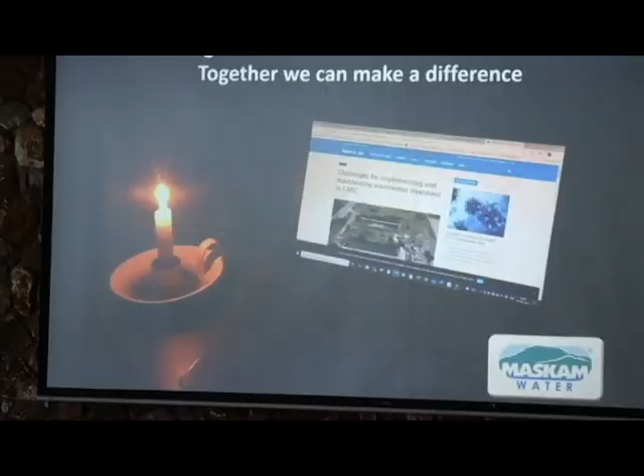Let's look at where we can make real big impacts: wastewater. Things have changed quite a bit compared to 5 or 10 years back. In general, if you have a high density commercial area and you need to start treating wastewater and use it, how many people think it's possible to do that in a high density city environment?

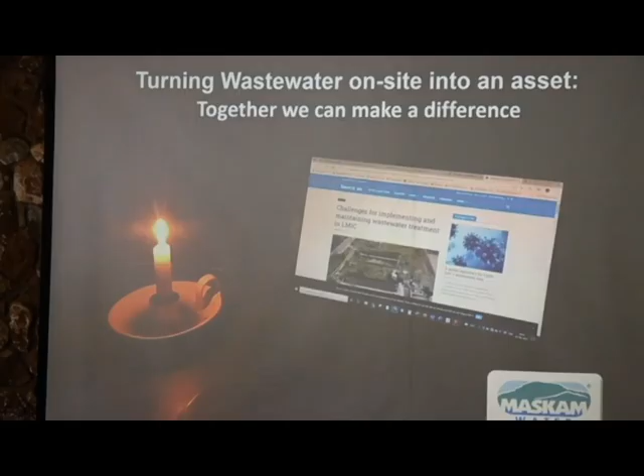That's only 4 people in the entire room. Well, okay, you're one of the 4, Laura. Let me show you something.

First, let's look at our water cycle. We have our catchment area, which normally ends up in a dam somewhere. We abstract from that dam, put it through a filtration system, use it, discharge it through an overloaded municipal wastewater treatment works, and pollute our water course.

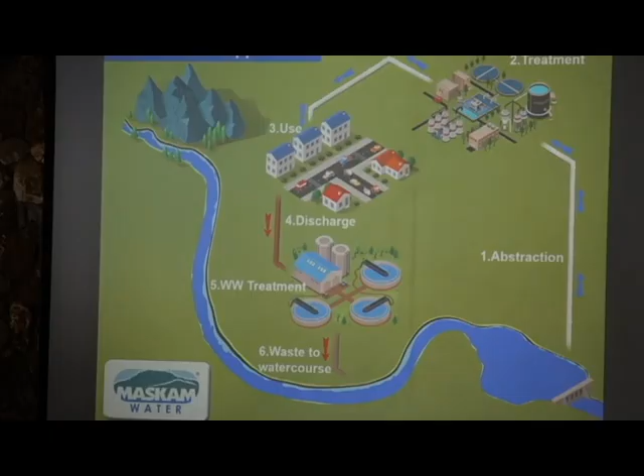This is very important. Remember what I said earlier, when you flush it, it's gone, it's out of sight, it's not your problem? Look what's happening here - it's coming back to be your problem because you're feeding it into a water course that feeds your drinking water. I do apologize for the sensitive ears, but you're literally pouring into your own drinking water. When you discharge your wastewater to a non-functional or overloaded municipal wastewater treatment work, you're pouring into your own drinking water.

There's no nice way to say it. Now, but in my town it's different, because in my town this wastewater system discharges below the dam wall. Oh, beautiful, you just feed it to your neighbor. Come on, where's Ubuntu here? That's what we end up doing.

At the previous meeting, I asked everybody by a show of hands who believes eating healthy is good, and just about everybody put up their hands. Then I asked who likes some nice grapes every now and again, and everybody put up their hands again. I said, now you think if you flush a problem in Gauteng, it's going to go down the Vaal River and it's not your problem? Guess what? Your grapes come from Upington.

The farmers in Upington have a problem with E. coli in their water in the river, because that river is coming from Gauteng. So you export your sewage problem to Upington and you import it back in the form of grapes. That's how the water cycle works, whether we like it or not.

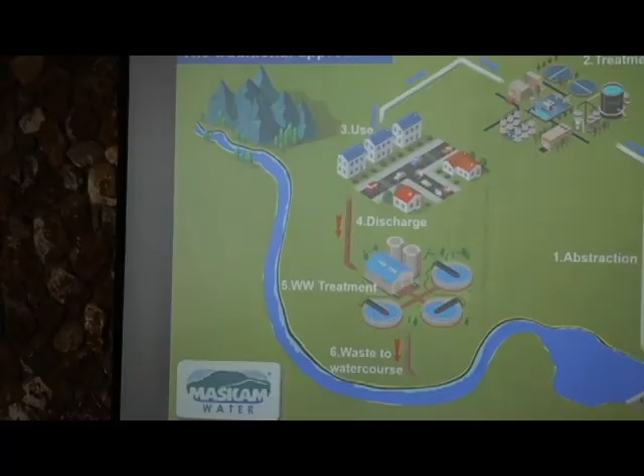But there's another little problem here - the carbon footprint. Not many people think that water has a carbon footprint. It's a natural thing, how can that have a carbon footprint? Would you agree?

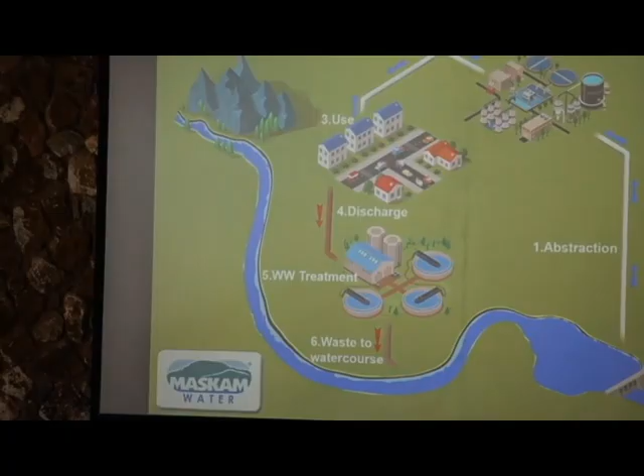Well, the problem is, if you're in Pretoria and you get water from the Vaal Dam, what's the figure? About 60% of Pretoria's water is coming from the Vaal, I think. If you look there, that's 124 kilometers line of sight, so you're looking at about 150 to 200 kilometers of pipeline needed to pump that water. But your problem is, from here to there is a 300-meter rise. You need 30 bars of pressure to lift the water to Joburg before you can flow it down to Pretoria.

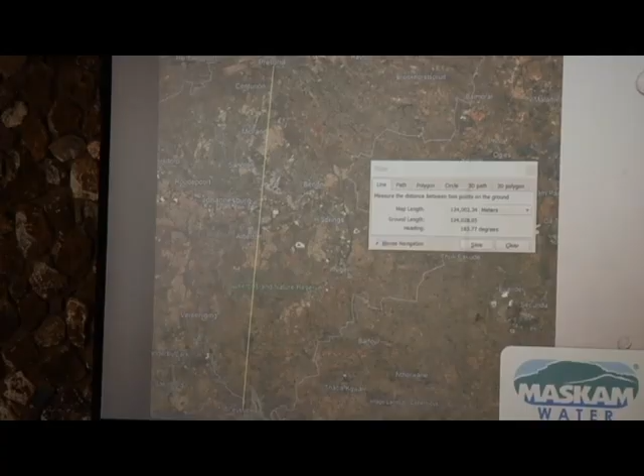30 bars of pressure - to give you an idea, your irrigation system at home runs on 3 bars, your average geyser runs at 4 bars. We're talking 30 bars here to lift that water to Joburg before you can get it to Pretoria. What is your carbon footprint on that pipeline? What is your carbon footprint on those pumps? What's your carbon footprint on the electricity that you use for that? Now we're not even talking purification and all the other stuff that goes with it. So your cost and your carbon footprint become huge in cases like this.

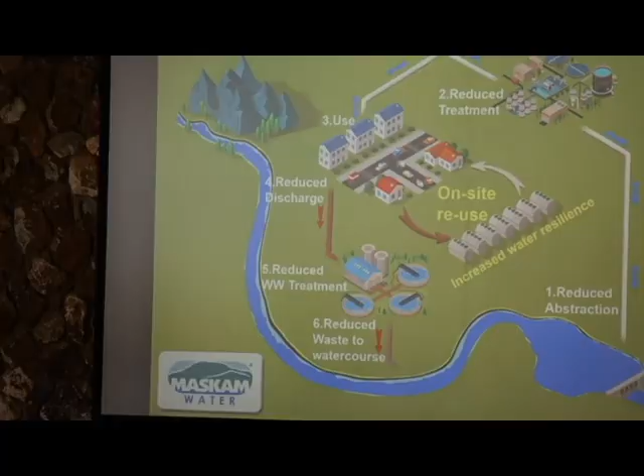So what we now do is start thinking a little differently. When we do on-site reuse, whatever wastewater we have, we treat on-site and take it back. We now start talking about increased water resilience. Every time you flush a toilet and treat it, you have water to flush the toilet again, no matter whether the municipal water is on or off.

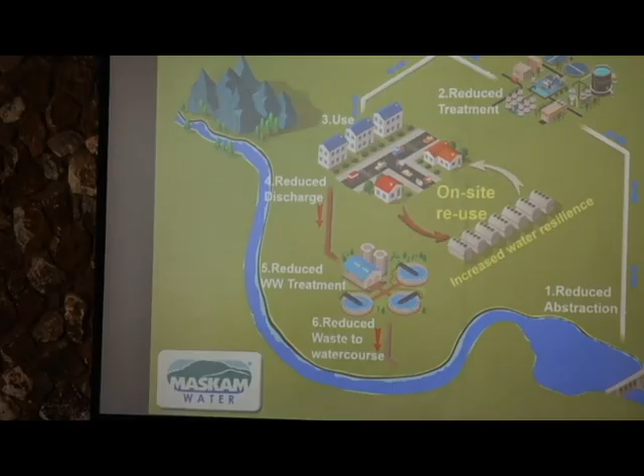So we're also talking continuation of operation, because people can stay on site and at least use the ablutions. Yes, you may have to buy water from your local grocery store for making coffee, but at least you have water for ablutions that you don't have to truck in. The minute you do this, you reduce your abstraction from your water course.

You reduce the pressure on your treatment system. You reduce your discharge, you have fewer overflowing sewer manholes, and you reduce the volume into Olifantsfontein wastewater treatment works. So you get a better quality effluent feeding the Hennops, which eventually feeds Harties again. So you improve your total water cycle.

You score big money here. Coming back, I don't have the figures right now for City of Tshwane, but for City of Joburg, commercial again, we're talking 98 Rand a kiloliter to get water from there. For commercial reuse here, you can do it for as little as 8 Rand. A saving of 90 Rand, that's a saving of close to 90%. Which other investment will give you a saving of 90%?

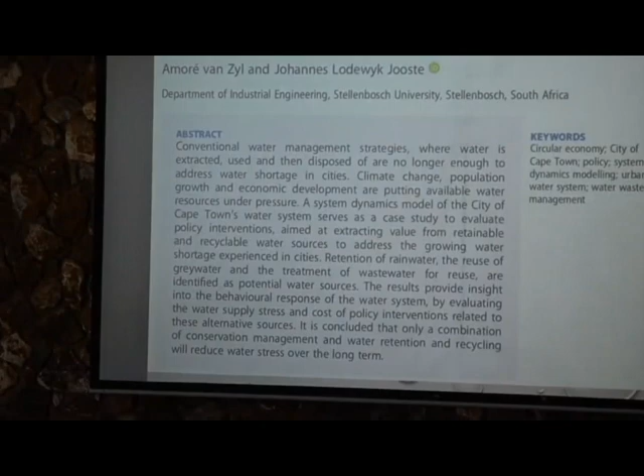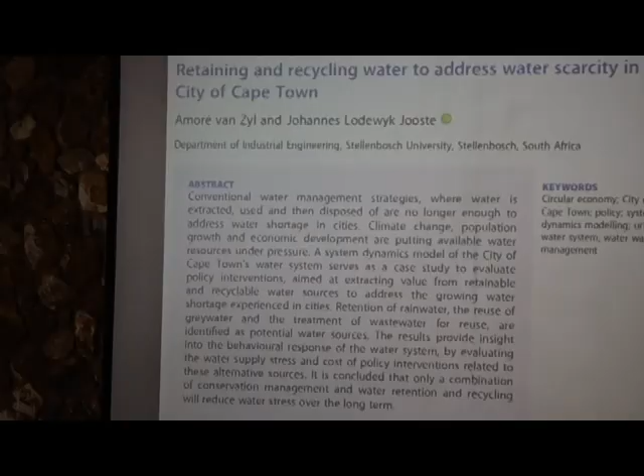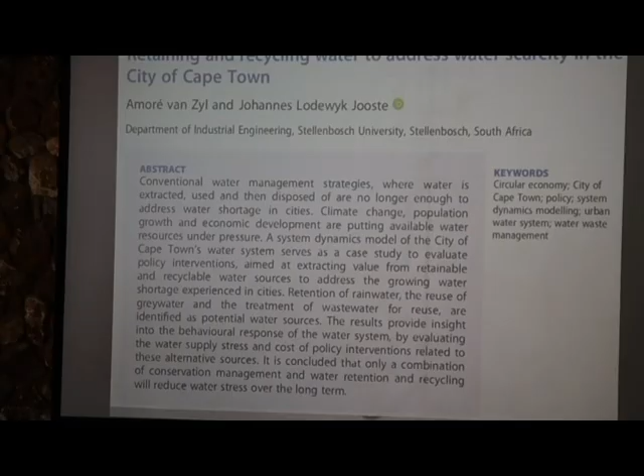In 2020, the University of Stellenbosch, and I'm not going to try to give you all the details, but in 2020 the University of Stellenbosch said: retaining and recycling water to address water scarcity in the city of Cape Town. They looked at all possible water sources taking Cape Town into the future. They excluded desalination because of the cost. And there's this whole document, if anybody wants it we can email it to you, talking about the benefits and how you can move forward, and how recycling will save the day and become a water source for the future for Cape Town.

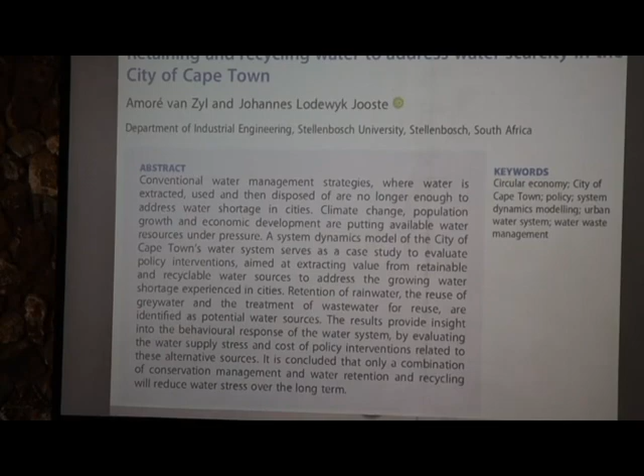Exactly the same thing applies here. I'm going to show you one technology. There's not enough time to go through different technologies. Yes, it is our technology. I'm a little bit biased here, okay?

The fusion system, which is an underground installed wastewater treatment plant, will recycle your water on site for you. It comes standard with a panel that has an early warning system, so if anything goes wrong with this system, it will immediately warn you before you have a pollution problem. And these early warning systems, I think, are critical, because something can go wrong, it's man-made, but you need to know when things go wrong.

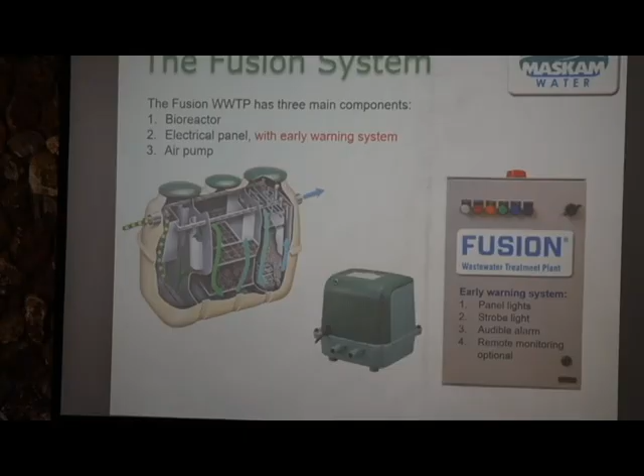So before you look at the price, because that's what most people do, before you look at the price, look at what you get for the price. Because I've seen that so often, people buying cheap and then having to remove it again later.

I'm not going to spend time on the technical side of it. Just keep in mind, without disinfection, there are at least 6 steps of treatment that need to happen to get to the water quality that by law you need to get to if you want to use or discharge this water. But at the same time, again, for pollution, otherwise you end up paying again with your drinking water.

Case studies. Where do you think is the highest risk installation you can have, in terms of if your system fails, you will have big problems? Where do you think is the highest risk installation?

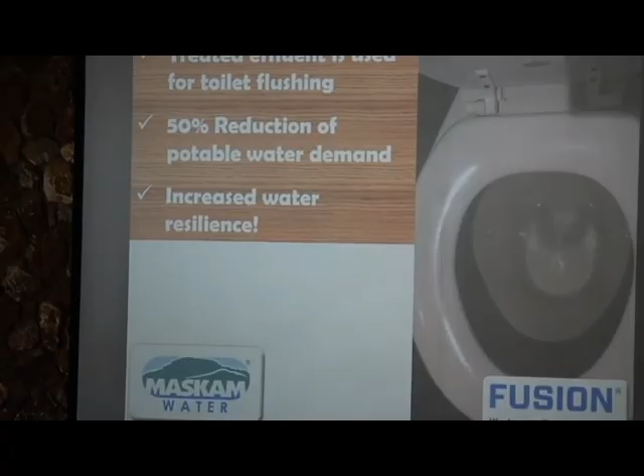The user experience, Nora, good or bad? Very good. This is what we're getting out of the system. And we've cut the water demand by 50%. Remember I said for domestic toilet flush it's about 30%. Here we're talking about a commercial building where toilet flush can be up to 90%. In this case it's 50% because they have showers and stuff as well. So you've just cut your water bill by half, but you also have water resilience, you always have toilet flush water.

For 6 years going now, I think the case study speaks for itself. You can do it in the city, you can make a positive difference. And that's why today's theme is talking solutions, because we hear so much about the problems out in the media already. Let's talk solutions.

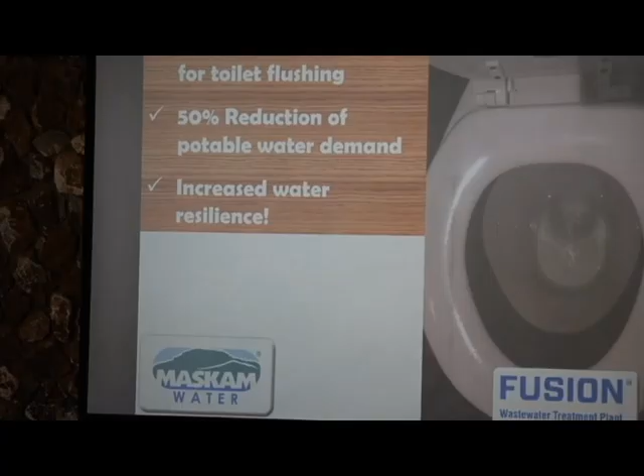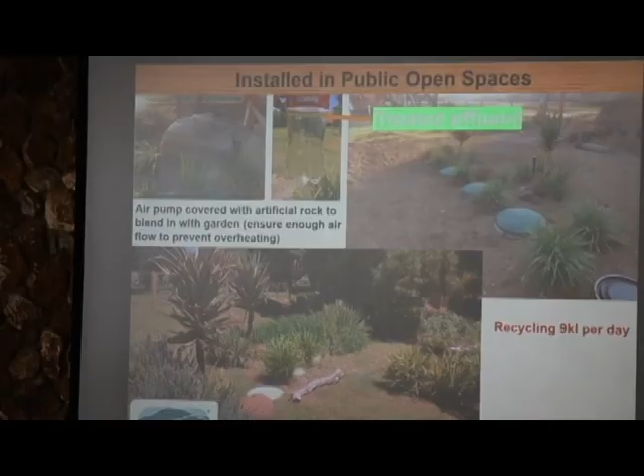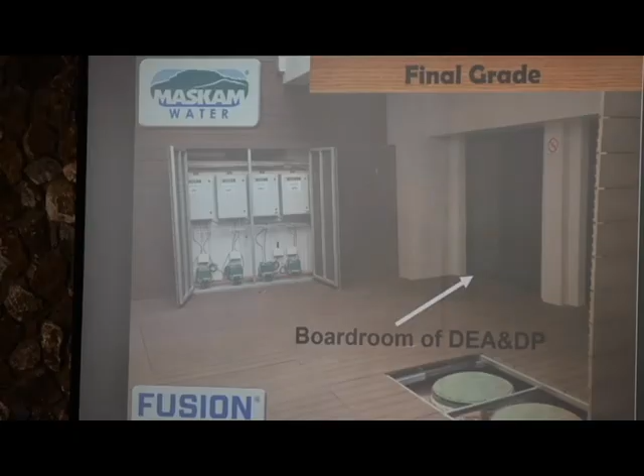This is on a small building. You can see how nicely it blends in with the gardens. There's your treated effluent again, your air pump. Now the air pump, going back a little bit, there's your air pumps applying. We had to put in 4 small plants because we physically had to carry them through the building, we couldn't put one big plant in because it just wouldn't fit. But that again is the beauty of having a Lego set, you can pick what's needed. So hiding that air pump there in the garden, we use a false rock.

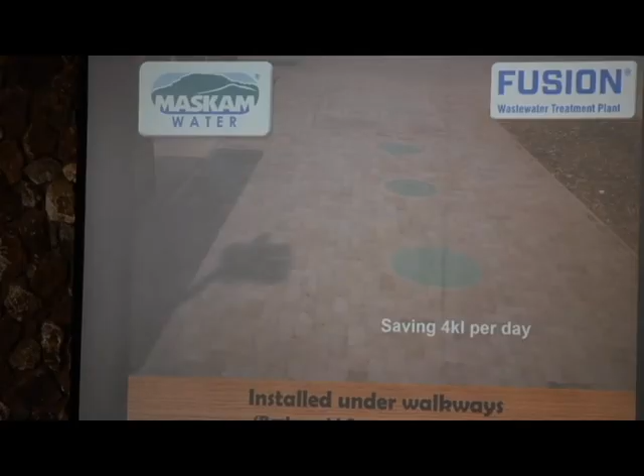In the walkway, in the paving, if you want to drive over it, you've got to do a proper slab. I know Umtrees has done one where people drive over it in the driveway feeding to a hotel. Unfortunately, Umtrees, I don't have that photo in the slideshow, but that is also possible. The hospitality industry feeds into the fusion, they use the water for irrigation purposes. There are farms, houses at the farms.

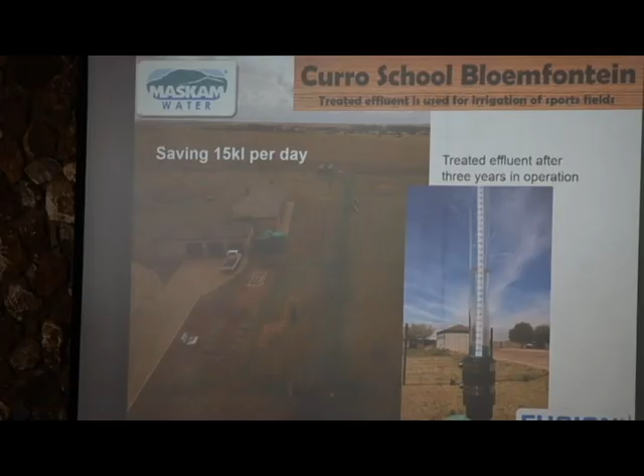Curro School, Bloemfontein. Again, you can see the treated effluent, they're using that for the sports field irrigation. But the beauty, now we start talking modular systems, because this was designed for a school having a maximum of 600 learners. Then the school grew, they're just over 800 learners now, so the wastewater treatment plant is too small. Big problem? Nope. We just dropped in number 3, and now they can go up to 900 learners. When they go above 900, we drop in number 4. And so we can expand as the demand of the site expands.

Isn't that beautiful?

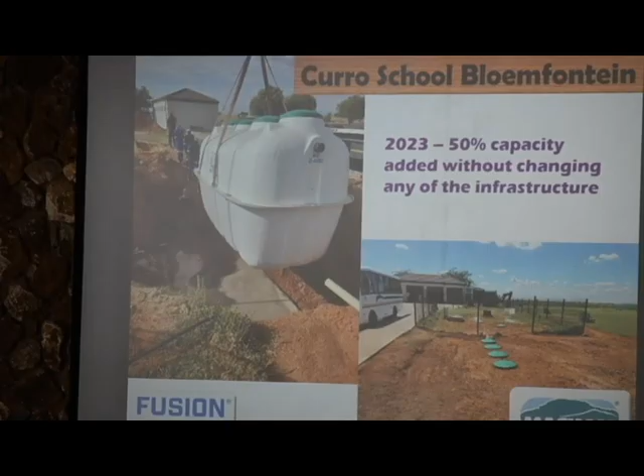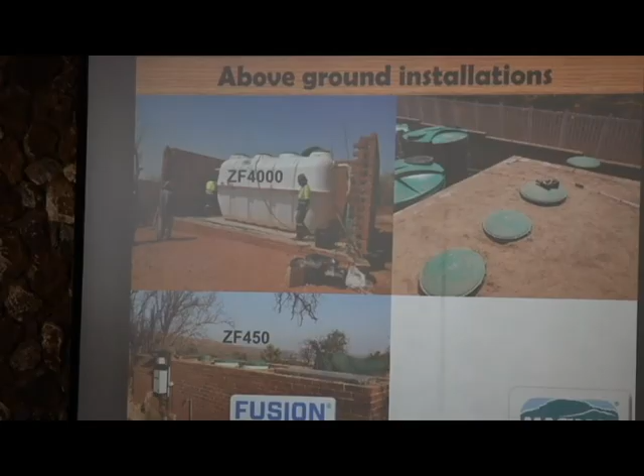They've been doing this in Gauteng since 2012. So these are all installations that countries have done above ground. Some of them are in Mpumalanga, some are here, not very far from here in fact.

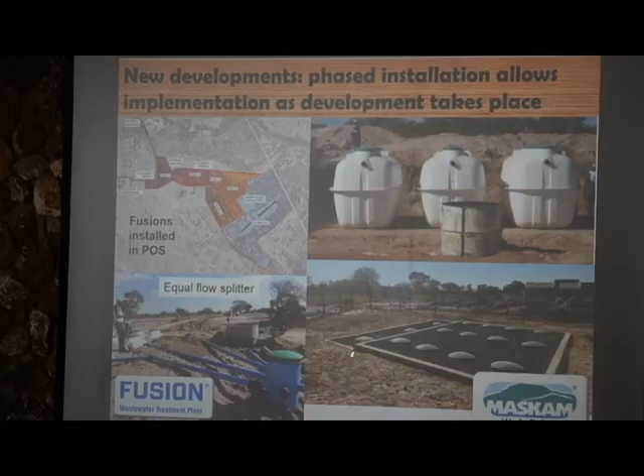This one we did phase 1 in November last year. You can see many more phases to come. Again, this is in KZN's typically hilly areas. The EIA experts will tell you what a nightmare that becomes, some will make a lot of money so for them it's not a nightmare, but every time you have a waterway crossing or a catchment crossing, the EIAs need to go through, plus pumping stations to pump it up 50 or 100 meters. So in this case, it will be fully decentralized.

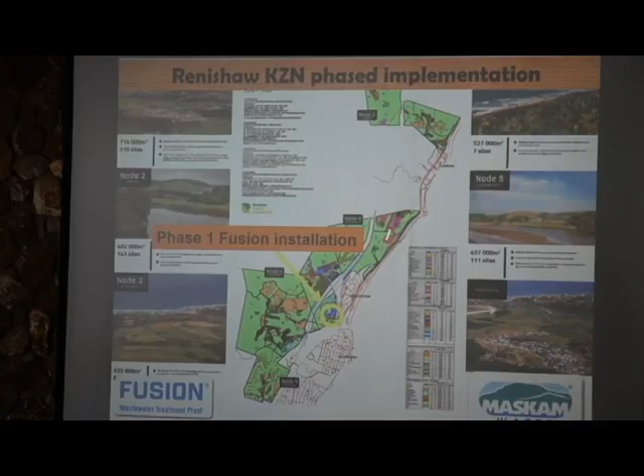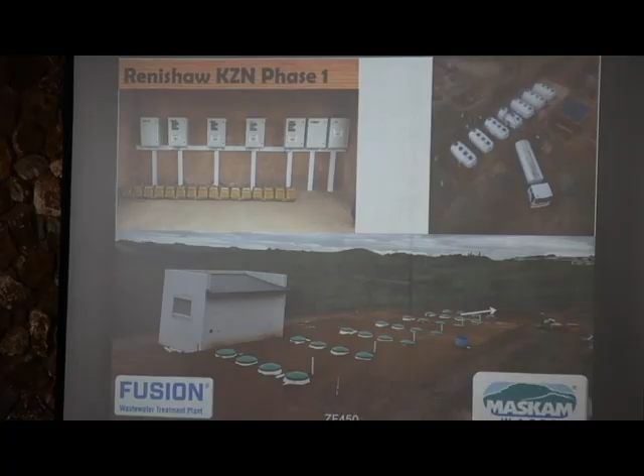This is the shopping center we've done here, shopping center, filling station and church. The rest of this development will come as they build. The next phase is in a few months from now. So there you can see what it looks like. These 7 plants standing here will service the shopping center, the filling station, and the church.

In the case of a domestic setup, this will serve 140 houses. It uses 2.5 kilowatts per hour. That's nothing. For 140 houses, 2.5 kilowatts per hour, that's just for the treatment. It excludes pumping back and so forth.

It's out of sight, fits in very nicely with your landscape. There are a few more projects like that coming up, and in future we will have some more to show on that. There you can see the 7 tanks during the installation period.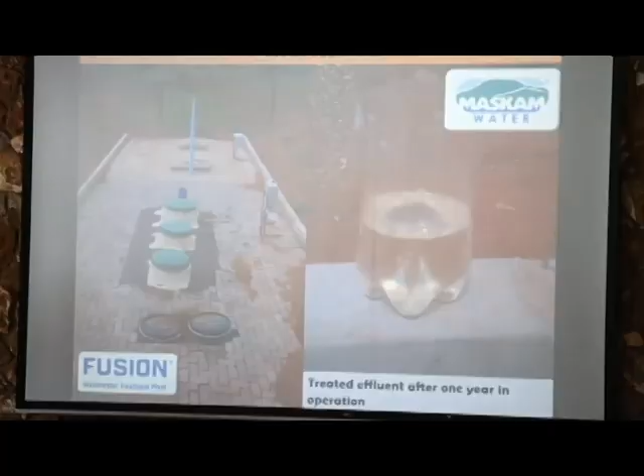This is a filling station, again the treated effluent. A mining village, again the treated effluent, which they wanted to use for growing veggies on site there. A campsite, here you don't put your drinking water, you sleep next to your pool. But imagine from a noise point of view, you're out in nature, it's all quiet. These are individual campsites, so you don't have a neighbor. And you've got your air pump running there, you don't hear it at night.

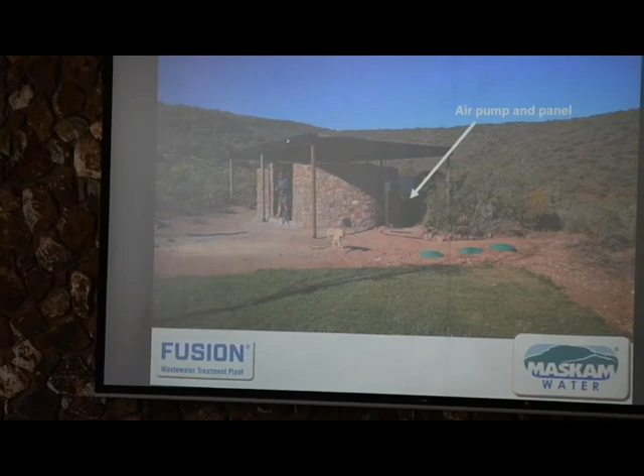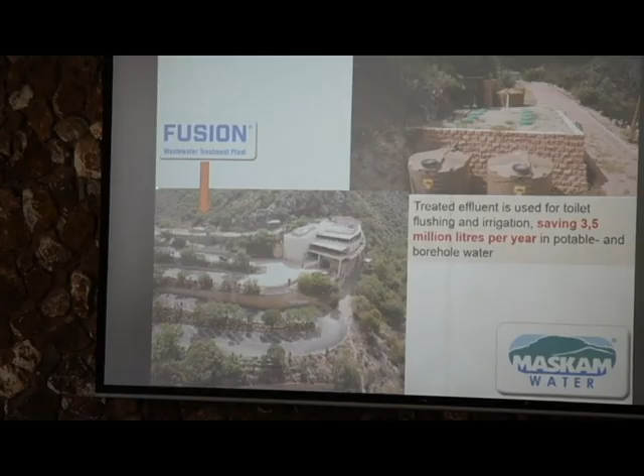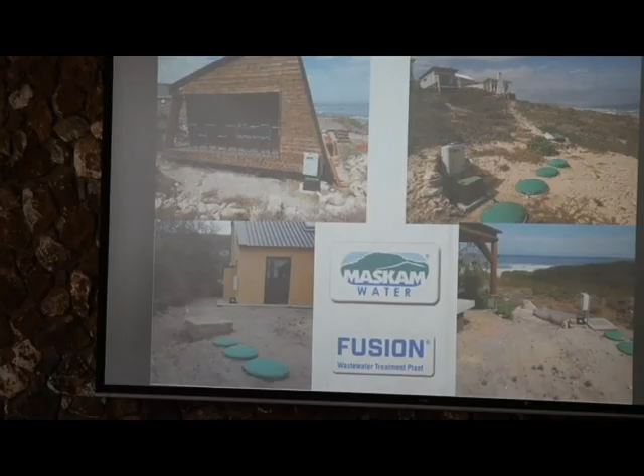So the case studies just show you it is possible in just about any location. Different technologies are suitable for certain locations, but you can do it anyway, and you can recycle 100% of your water for non-drinking purposes. If you want to take it to drinking purposes, then you go through a reverse osmosis system. You will have, depending on the system you use, anywhere between 25 and 45% waste. So there you do lose water, and it also becomes more expensive.

We are busy with a case now where there is no drinking water, there is no municipal supply. The boreholes can only deliver 8% of the total volume needed. Rainwater harvesting is difficult, it's going to be done, but for 3 months of the year there is no rain. So the only option left is to take treated effluent back to drinking water standards, and then blend it in with the rainwater and the boreholes to be the total answer. So it's doable, but it's your more expensive solution. Your cheap solution is to use that for non-drinking purposes and save your expensive water for drinking, for showering, for human contact.

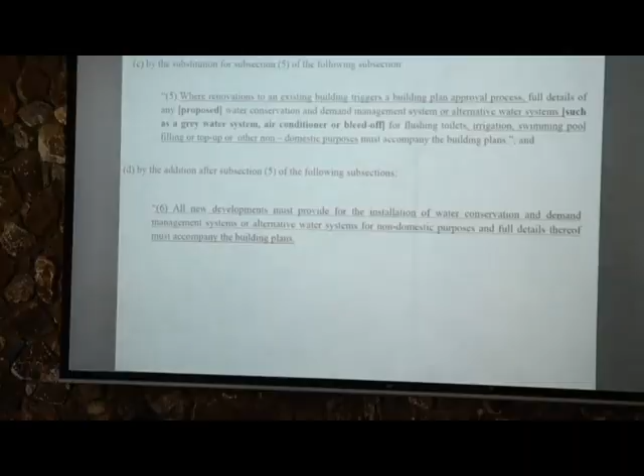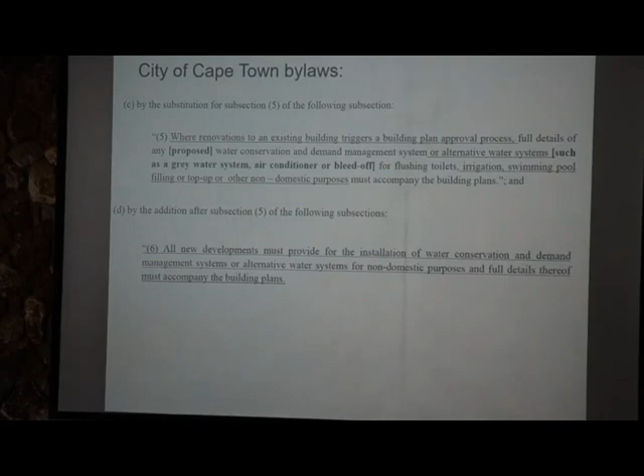City of Cape Town already in 2018 passed bylaws saying renovations and new developments must make use of water conservation and demand management systems, or alternative water systems for non-drinking purposes. It's already law in Cape Town. And I stand to be corrected, but I believe Ekurhuleni is also coming to a point where new developments must do their own wastewater treatment because they can't do it anymore. So these things are changing. Municipalities used to resist this, but they don't really have an option now but to adopt it.

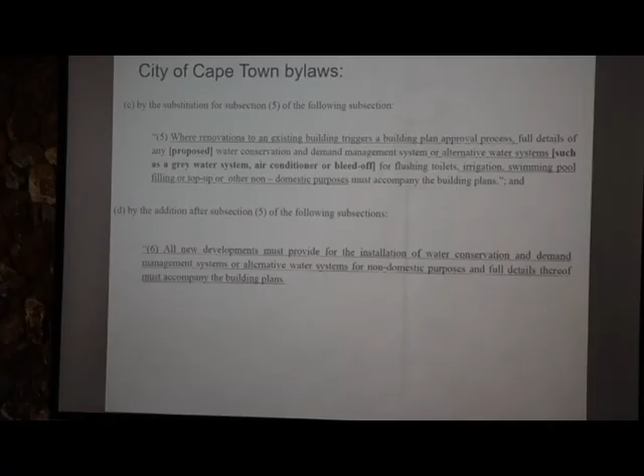Green Cape has done a study also in 2020 promoting on-site treatment and reuse. I may be in trouble for what I'm going to say now, but I'm not known to be scared of trouble. Green Cape, their purpose is to promote green technology.

Started up and funded by the Western Cape government and City of Cape Town. Now these are private funders as well. I couldn't quite get Green Cape to buy into this thing. They did a lot of other green stuff, but this wastewater recycling thing, they didn't like that idea. Until I went to show them the case study at Department of Environmental Affairs. Three months later, they issued this paper, because then they saw in proof what is possible.

Another study by them was the Cango Caves. You can read up on the website. They actually give you the numbers.

And this is the first property where we did on-site wastewater treatment, August of 2010. The beauty is they're moving that house now. They've broken it down last year. They're moving it, taking out the Fusion, they're moving it with.

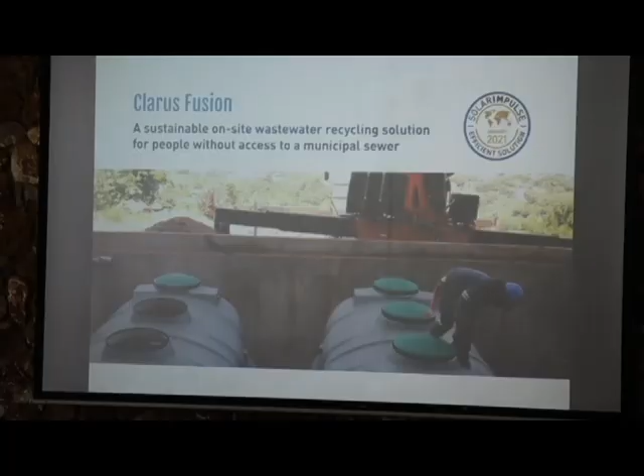So there's some green material. Also going to the Solar Impulse Foundation. There's only two companies in Africa that's listed with the Solar Impulse, and this is one of them. There's a set of criteria, and one of them is you must already be in commercial operation. It's not a trial or a design or a test phase, it must already be commercially accepted.

Then when we look at on-site wastewater, I'm not going to spend time on that, but we speak to 13 of the 17 SDGs. Not all 13 necessarily on the same site, but we speak to 13 of the 17 SDGs. Now, to all the corporates sitting here, and all the consultants to corporates, if you want to increase your SDG score, have a look at this. This is a way to do it.

Now, you can take it one step further. If you're corporate and need to spend your corporate social responsibility money in communities, when you spend money in a community, you start talking about no poverty, because people can use the water to grow food. You talk about zero hunger, gender equality, and health. How do you talk about health when you're talking wastewater? It's very simple. Kids don't play in sewage contaminated soil anymore because you're giving proper sanitation.

So when you fund something like this for a community, you score SDGs, but you also get your points for your community responsibility. So it's a double win yet again.

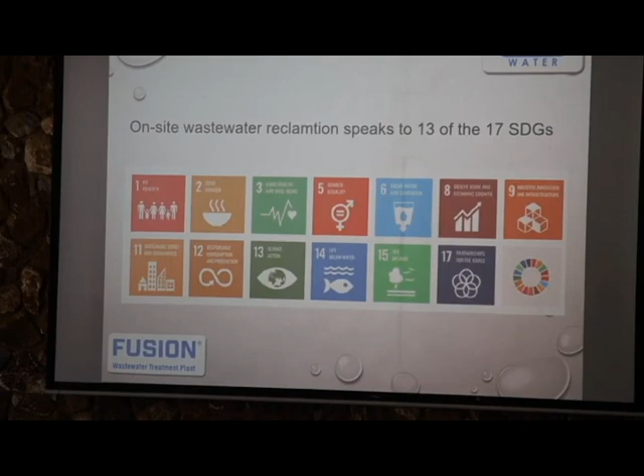For those of you who say, yes, I'd like to do this, but it's too expensive, I don't have 100 or 200 or 5 million, whatever the case may be, to spend on this intervention, it can be financed. We're working with Capital Box there. So you can finance it, and your saving in buying water can carry your installment. So you're cash flow neutral until your investment is paid off, and then you're cash flow positive. So you can get involved in this intervention without having to fork out the big money that you don't have.

There is also a possibility of rentals, that's a bit more strict, but we have companies that don't want to buy the equipment, they don't want it on their books, but they will rather have the operational expense of a rental. It is also possible through the financing model.

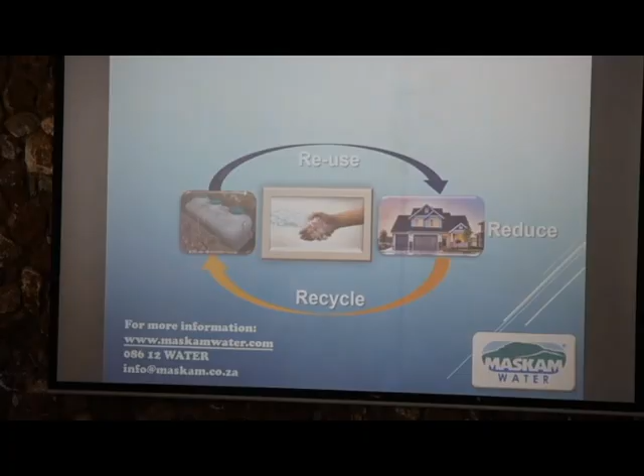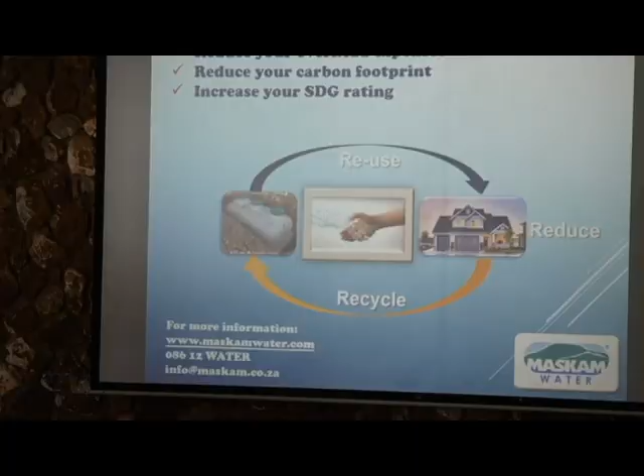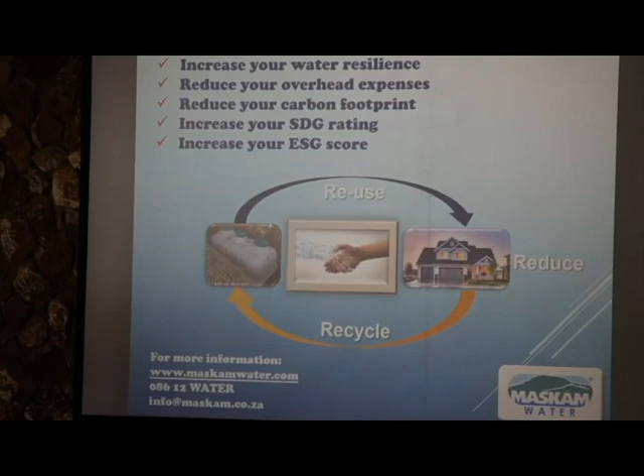So ladies and gentlemen, with that, I want to say on-site recycling will increase your water resilience. It will reduce your overhead expenses in not buying water, or buying less water at least. It will reduce your carbon footprint, increase your sustainable development rating. It will increase your ESG score because environmentally, you need to drop your water consumption by 20%. You can do it with this. So you can score on your ESG.

And you save our water courses, which Darren will love when you go off grid. Thank you very much.